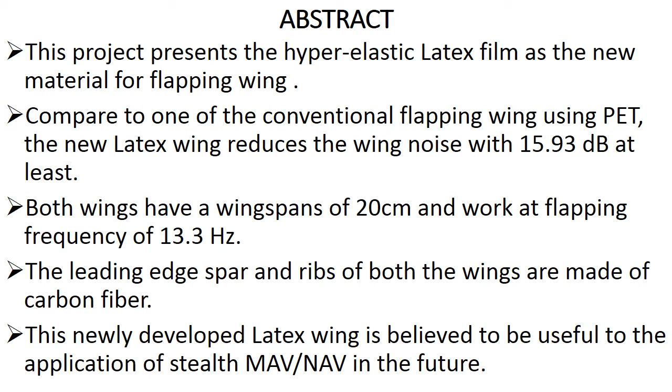Introduction. Flapping micro air vehicles recently attract people's attention due to their low speed, air maneuverability and small size, good for short range surveillance. This project aims to investigate the influences of wing configuration and foil stiffness on the aerodynamic forces by acoustic comparison.

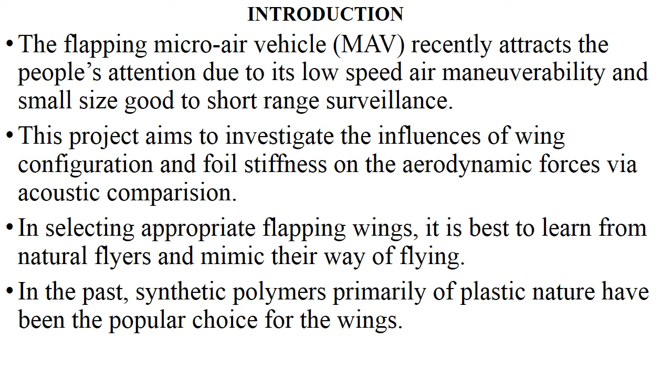In selecting appropriate flapping wings, it is best to learn from natural flyers and mimic their way of flying. In the past, synthetic polymers, primarily of plastic nature, have been the popular choice for design and fabrication. Noise reduction issues of MAVs.

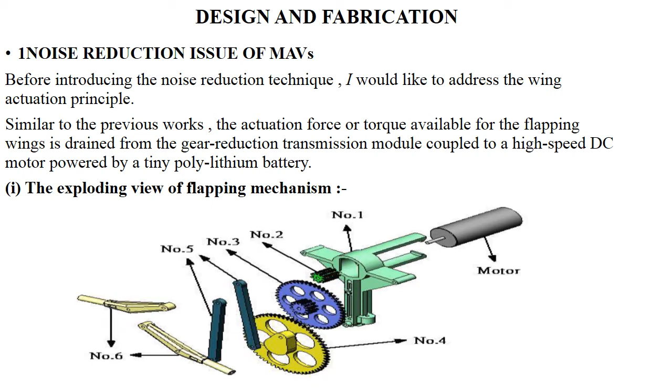Before introducing the noise reduction techniques, I would like to address the wing actuation principle. Similar to previous works, the actuation force or torque available for flapping wings is drawn from a gear reduction transmission coupled to a high-speed DC motor powered by a tiny lithium battery. The exploded view of the flapping mechanism we can see from the diagram.

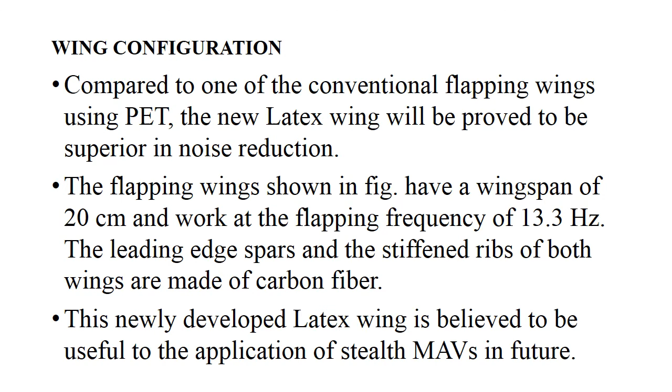Wing configuration. Compared to one of the conventional flapping wings using PET, the latex wing will be proved to be superior in noise reduction. The flapping wings shown in the figure have a wingspan of 20 cm and work at a flapping frequency of 13.3 Hz. The leading edge spars and the stiffened ribs of both wings are made of carbon fiber. This newly developed latex wing is believed to be useful to the application of stealth.

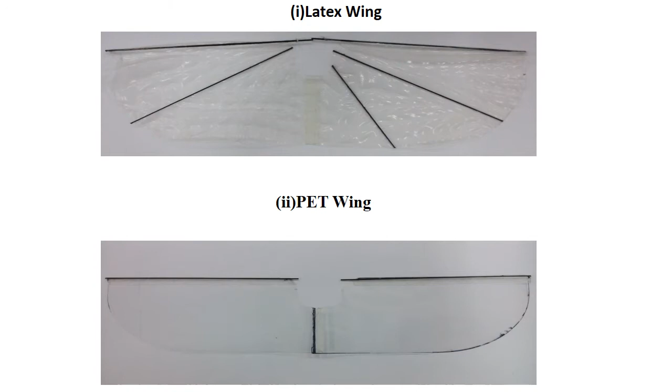The first one is the latex wing, which is the new material wing, and the second one is the PET that we are using in daily MAVs. Here we are comparing both of these wings. Then both wings were mounted on the testing platform and the noise was recorded for the acoustic comparison by using Adobe software.

Then acoustic measurement. Adobe Audition is used to analyze the audio signals from flapping wings. The process of obtaining the spectral waveform of the PET and latex film was done in the following steps. The mechanism was allowed to run at 13.3 Hz and the sound of the motor combined with the ambient noise was recorded. This recording was clipped to 3 seconds of audio and was taken as the reference file for the noise reduction profile used for cancelling mechanism and ambient noise.

Noise reduction process. The noise reduction process is the process to filter the sound of objects by removing unwanted noise, like ambient and motor noise, using the Adobe Audition software. By using Adobe Audition software, we can get the wing noise.